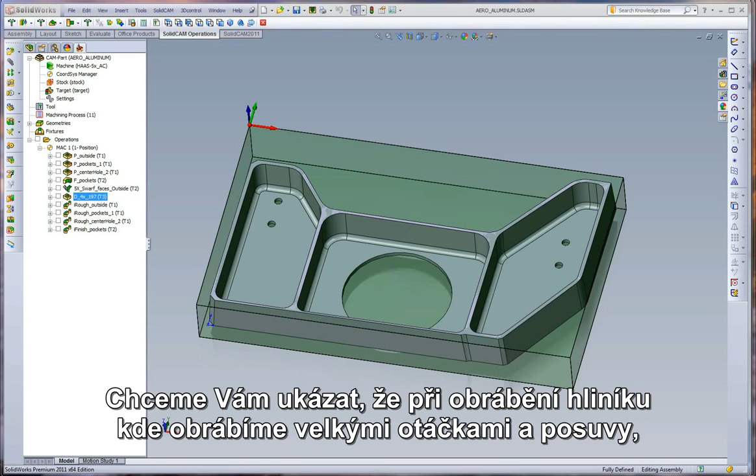Hi, today we're going to compare standard machining to iMachining for aluminum. We want to show that even with aluminum machining, where we cut at very fast RPMs and feed rates, iMachining is still giving a faster overall cycle time for roughing, rest roughing, and finishing.

So what we have here is an aluminum aerospace part. It is basically a 3-axis part, minus the outside cut which has a 5-axis taper to it.

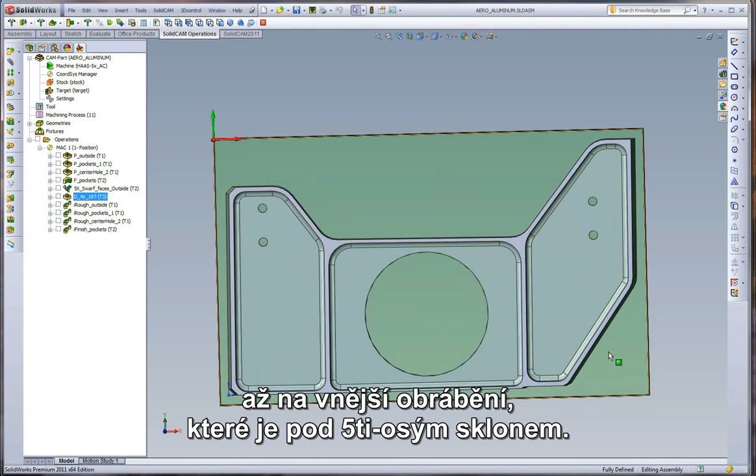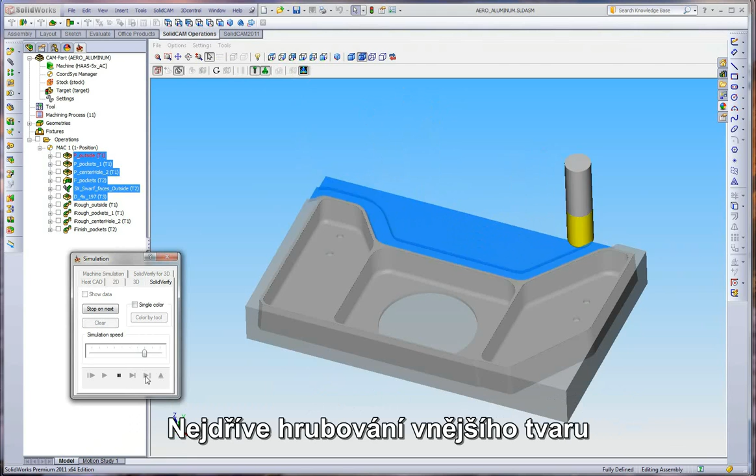We'll run through the simulation first on the standard cuts and take a look at what we're comparing. We'll move to our solid verify. The first thing we do is rough out the outside. We'll take a look at the part as we go through the simulation. So the first cut is roughing the outside shape from the aluminum stock.

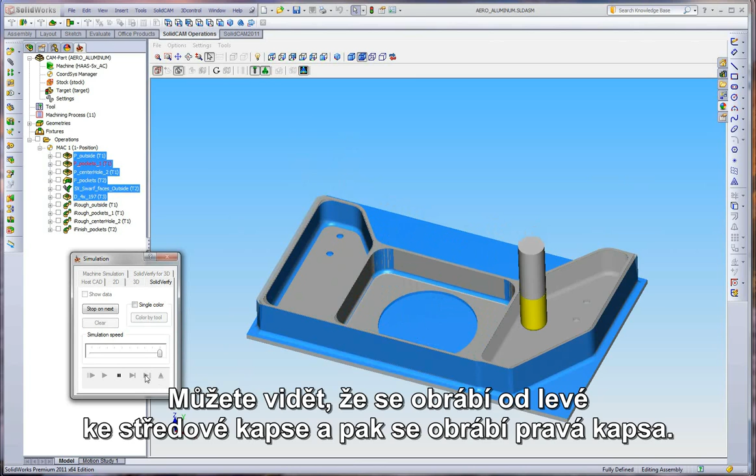After that, we move to the center pockets. You can see going from the left pocket to the middle pocket, and then to the right pocket. After that, we're going to machine the center through hole.

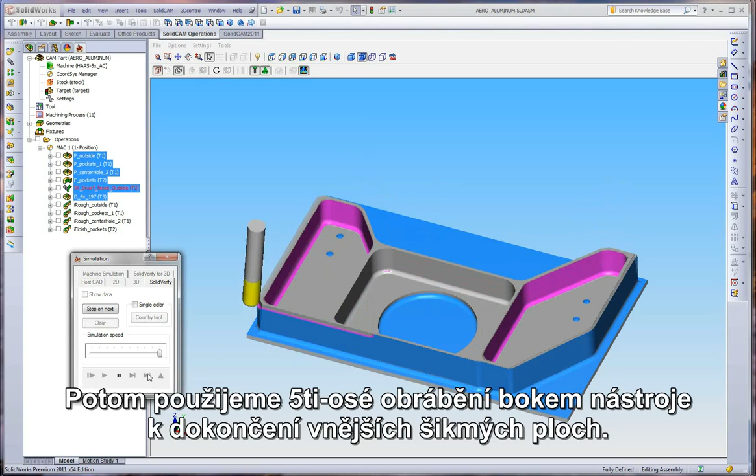After we're done roughing, we're going to use a smaller end mill to finish the walls on the inside pockets. After that, we're going to use a 5-axis swarf cut to finish the outside tapered surfaces, as we see here.

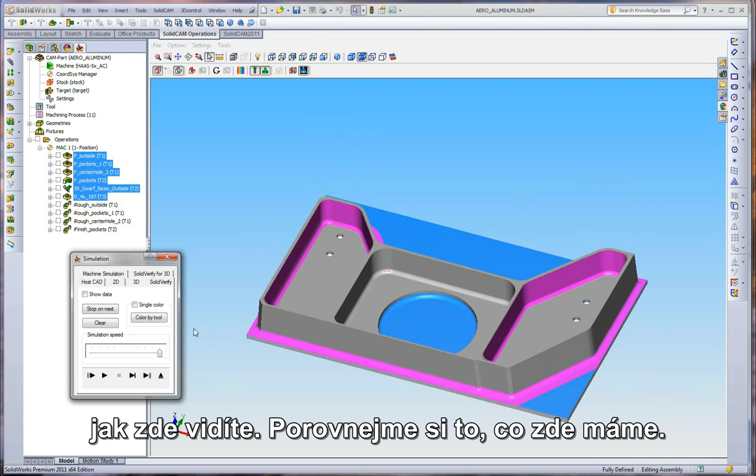And then finally, when this is done, we're just going to have a simple drilling operation to put in these 4, .197 diameter holes, as shown. So now let's go compare what we have.

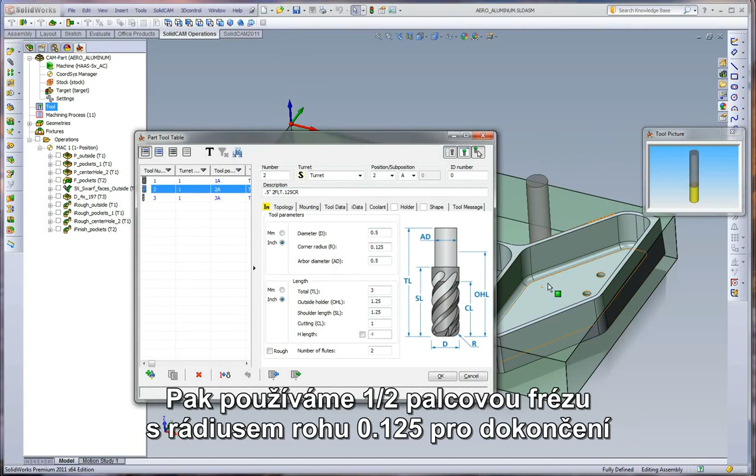What we're using is 3 tools to do this. We're using a 3/4 inch with a .125 corner radius 2-flute carbide end mill, as we can see on my mouse, for the bulk roughing. We're then using a 1/2 inch with a .125 corner radius to finish the outside and the inside. And finally, we're just using a .197 drill to finish the 4 holes.

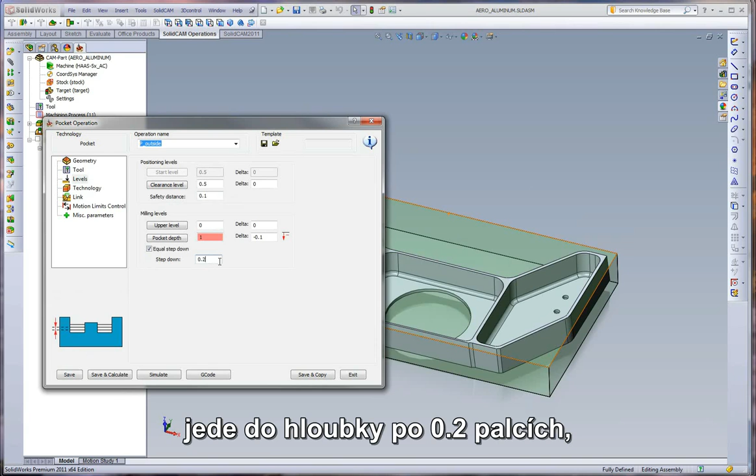Now let's compare what we're doing with standard pocketing. The first operation, we're doing a 200 thousandths depth of cut. Our feed rate for this is 8,000 RPM at 100 inches a minute.

If we go to our second cut for the center pockets, using the same tool, same feed and speed, 8,000 RPM, 100 inches a minute, and we're doing the same 200 thousandths. In this operation, we're also finishing the floor with the ball mill, so we have a 15 thousandths floor offset, and we are finishing with the same tool.

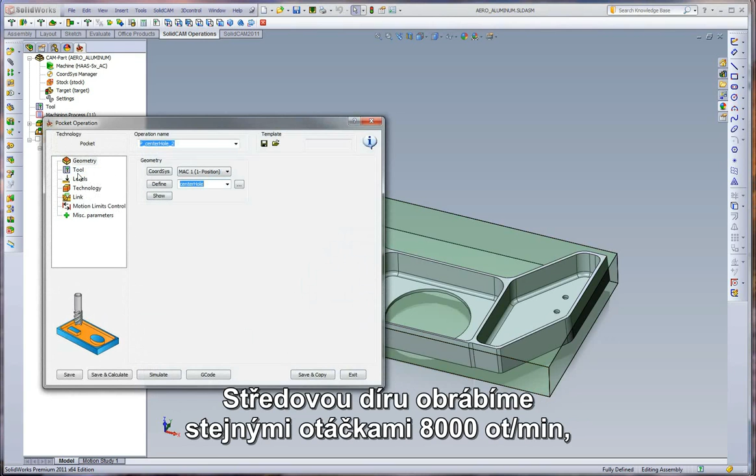For the center hole, we are doing the same 8,000 RPM. The only difference here is we're also finishing the wall. When we are finishing the inside pockets, we're switching to the 1/2 inch end mill, still sticking with the same 8,000 RPMs and 100 inches a minute.

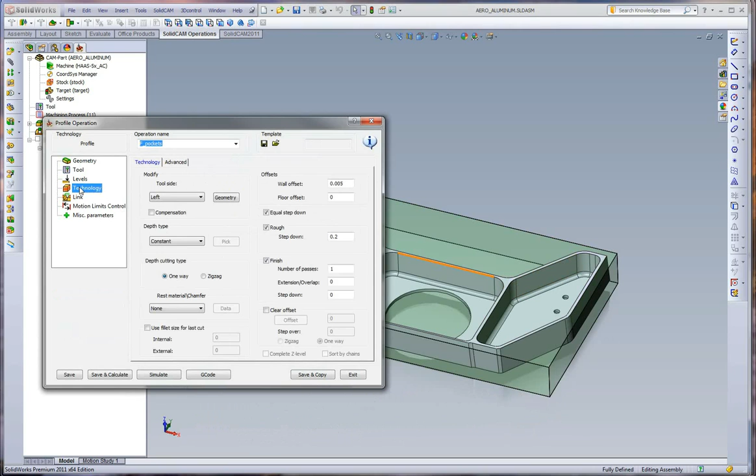When we go to our technology, we're doing a 200 thousandths step down still. However, we are doing a rough and a finish at the same time. Because of the excess material left over in all the corners, we can't just go right to finish size. We have to take a rough cut, which is 5 thousandths away, and then a finish pass, which is to size. If we go to the solid verify and take a look at this, it'll be quite clear what's happening.

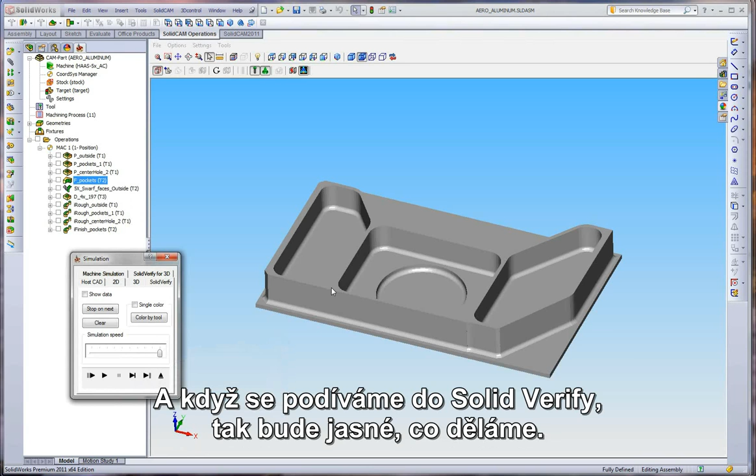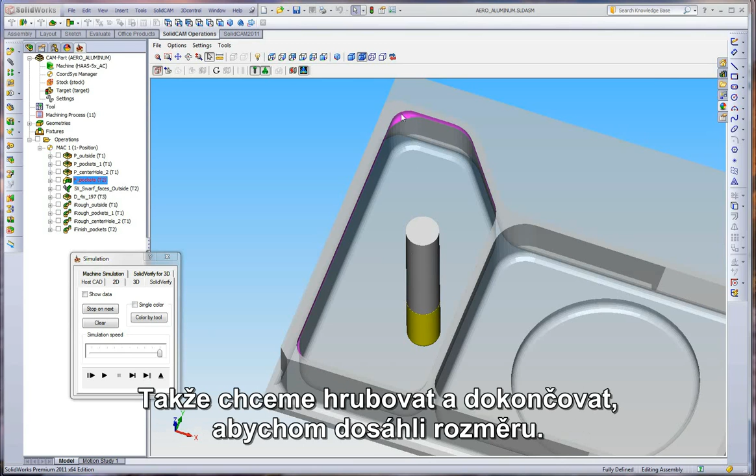So as we zoom into this one pocket here, and single step through, just one level, we can see that in some of the corners we have excess material from the larger tool. On the straight walls, we only have our 5 thousandths wall offset that we define. But because of that, we want to do a rough and finish to bring that wall into size.

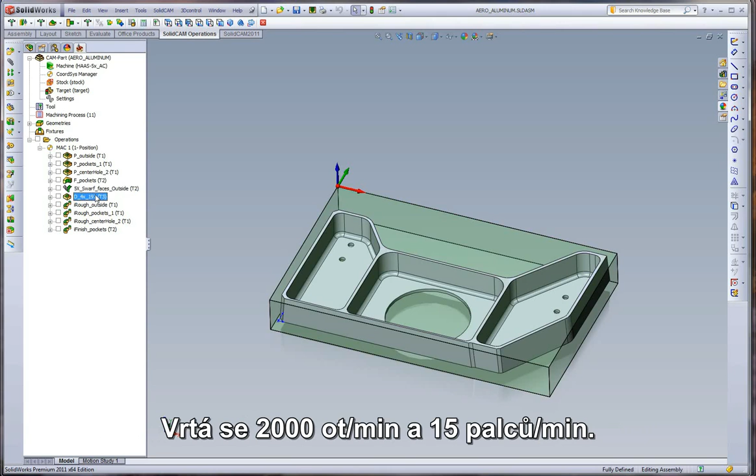The 5-axis swarf cut is doing the same thing as the pocketing: a 200 thousandths step down, 8,000 RPMs, 100 inches a minute. And the drilling is working at, I believe, 2,000 RPMs and 15 inches a minute with a straight peck.

Now, what we want to compare is what's the difference between iMachining and standard pocketing. So if we look at the standard pocketing toolpath, we can see we have multiple step downs, the 200 thousandths, and our step over. We see many repositions to continue with climb cutting.

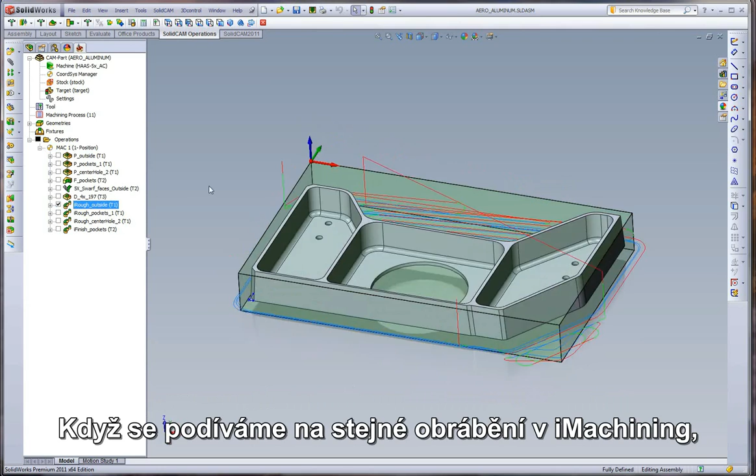If we look at that same cut with iMachining, what we see is no retracts. In iMachining, we're also going full depth of cut. We are doing a smaller step over because we're going deeper. However, the tool is staying engaged longer.

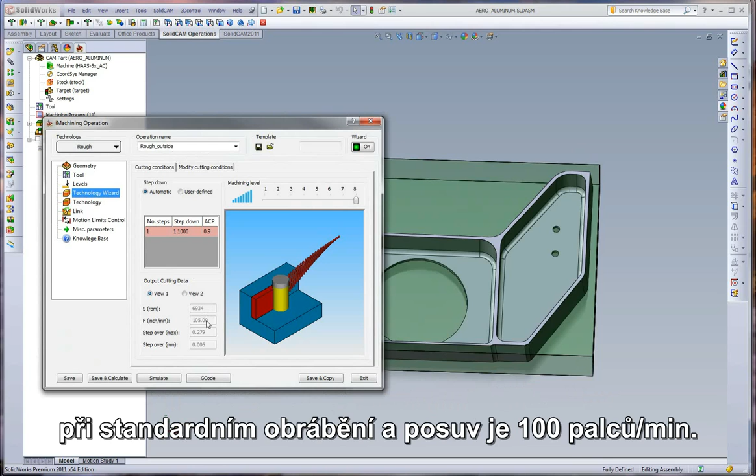If we go and look at the feed rates that we're running here, we're running a little less than 7,000 RPM, so a little bit less than the standard pocketing, and we're running 100 inches a minute. Those are the values generated from the wizard.

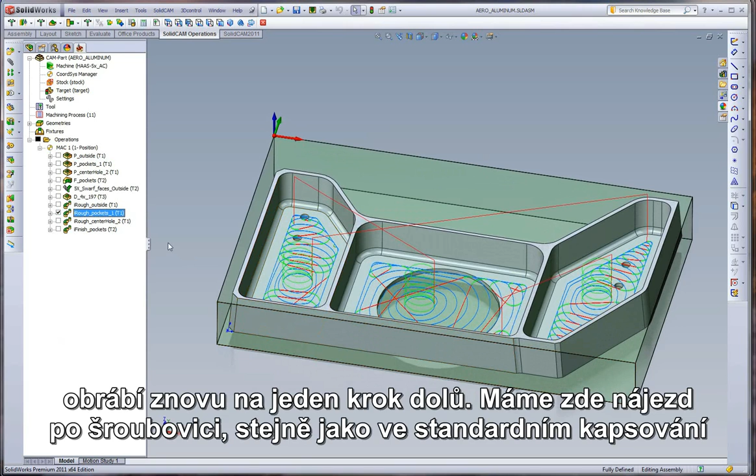If we look at the inside pockets, you can see we have our standard offset style strategy, once again doing multiple step downs. If we go to the iMachining strategy, we're doing a singular step down once again. We have our helical entry, just like the standard pocketing, both using the same helical angle, 5-degree entry ramping. The difference here is, as we see with iMachining, one step down, very few repositionings. We're running the same feed rate again as the roughing, less than 7,000 RPMs and roughly 100 inches a minute.

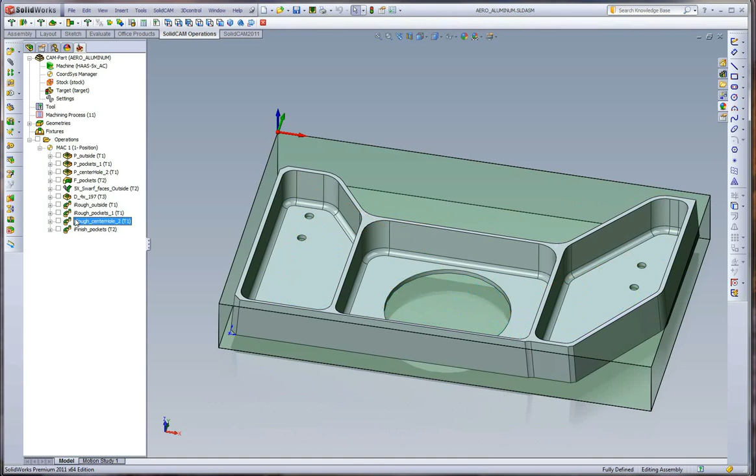If we look at the roughing in the center hole, it's basically the same as the previous operations. Now the finishing, this is where things get a little interesting.

If we look at the profiling operation, we have double passes around the entire part to try and achieve our rough and finish.

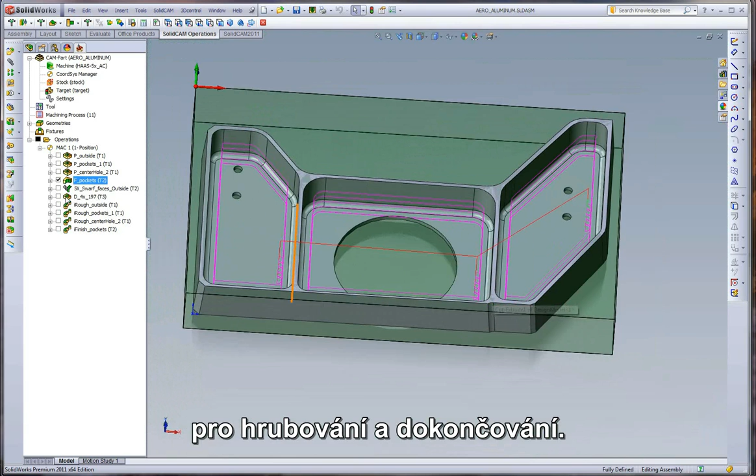When we look at iMachining and iFinish, we do something very special here. What we do is analyze the entire geometry and look at where the leftover material is.

As we see here, we have our parent operation, which was the rough pockets. It knows the previous tool, wall offset, and fillet radius, and what we do is analyze where there's excess material.

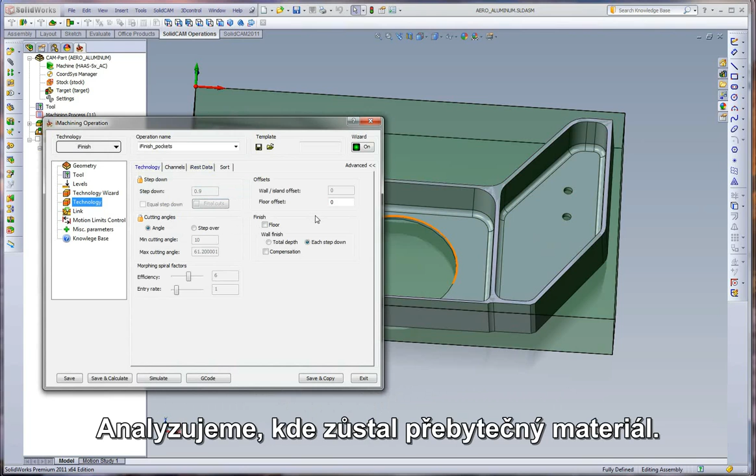What we're trying to achieve is a final finish pass around the entire contour that is just removing the wall offset. So if we were to go and look at this toolpath...

What we're going to see is any of the corners that would have had the toolpath being over-engaged, we are now finishing those areas first with a roughing toolpath.

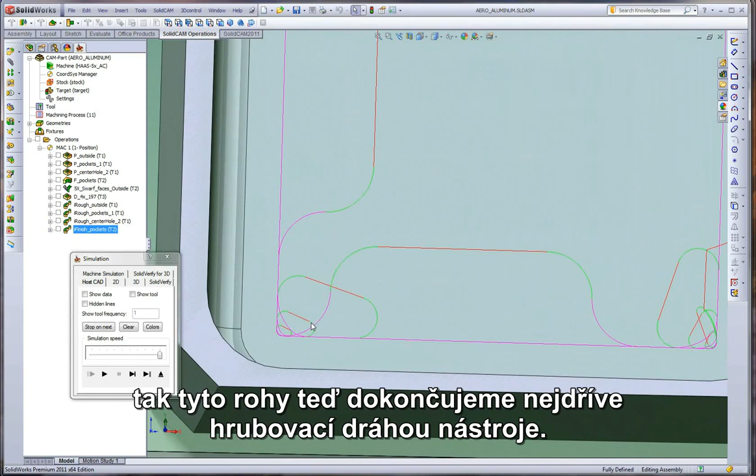So we see the corner here, the corner here. As we look at the large corners, where the tool would still be able to take the wall offset in one final pass, there's no toolpath.

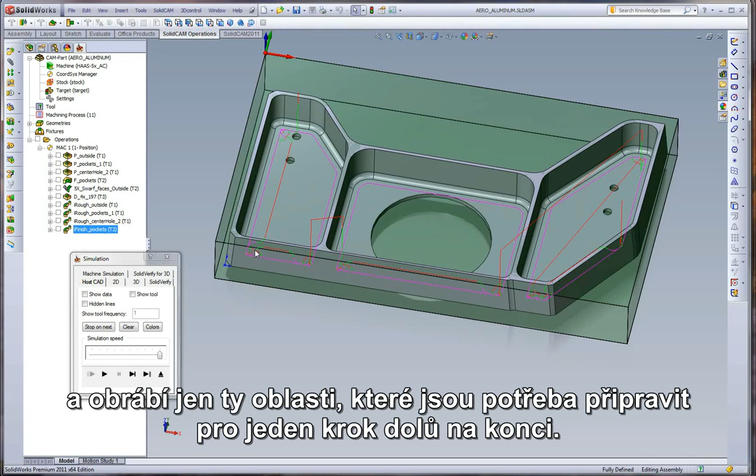So the difference here is iMachining is able to intelligently analyze the contour, machine just the areas it needs to first, to prepare for one single step down at the end.

This is very unique to iMachining. No other software has this.

This allows us to take one final pass at full depth of cut because we know we're getting full stability with the end mill, and that the tool is not going to get over-engaged in any of the corners, because iMachining took care of it.

We can go take a look at the simulation and see what's the difference between iMachining and the standard pocketing.

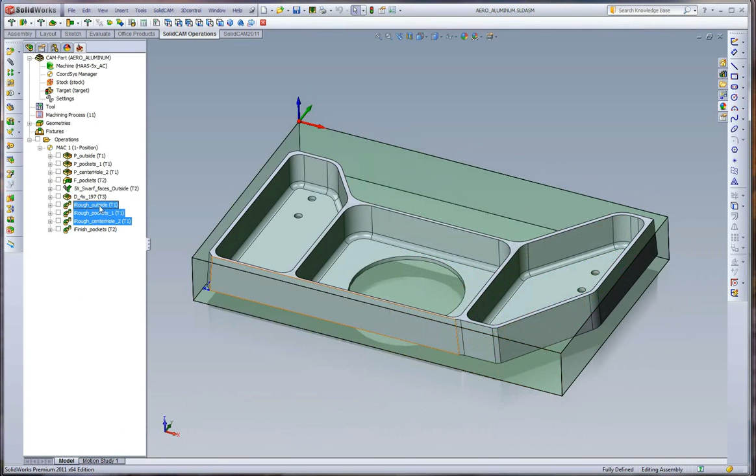We'll reorder these operations so we don't have to simulate them. Go to our solid verify. Once again, let's look at our part while the simulation is going.

So with iMachining, you can see it progressively shave the stock away from the outside. As we see it do the center pockets, we see it helical enter, and then we see it clear away the material at full depth of cut.

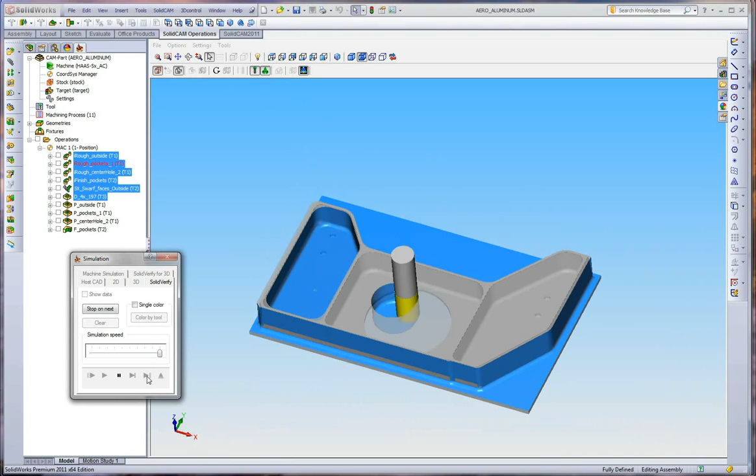Working from the left pocket to the center pocket, and then finally to the right pocket, progressively shaving away the material the entire time.

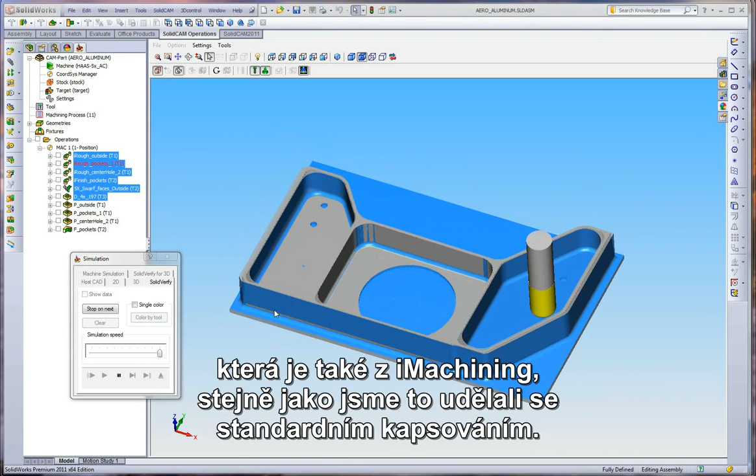We still have the finishing pass that we're using with iMachining, same as we did with the standard pocketing. After the three main pockets are roughed, we're then going to switch over and do the center hole.

Let's slow up and watch the iFinish toolpath work with the smaller half-inch tool. What we're going to see is it clears out the corners and gives one final preparation pass.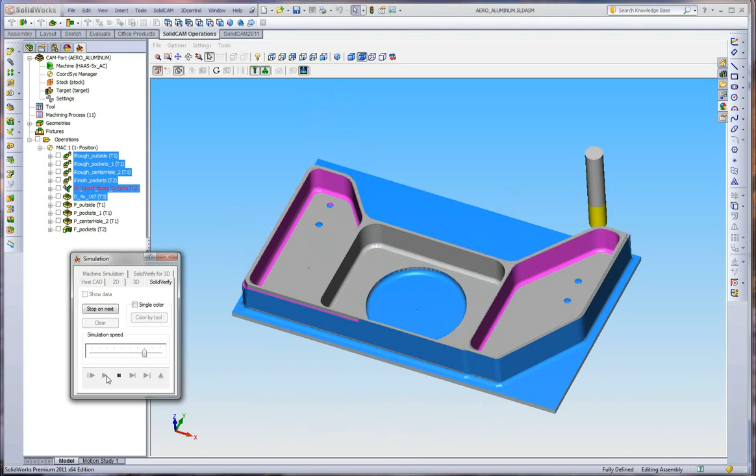And as we had with the standard, we're still using a 5-axis swarf cut to finish the outside.

Now for the nuts and bolts of what time savings we get. We have prepared a simple Excel document to explain the difference.

So we have our four cuts: roughing the OD, the pockets, the center hole, and the finish pockets. And then we also have our 5-axis swarf cut and our drilling.

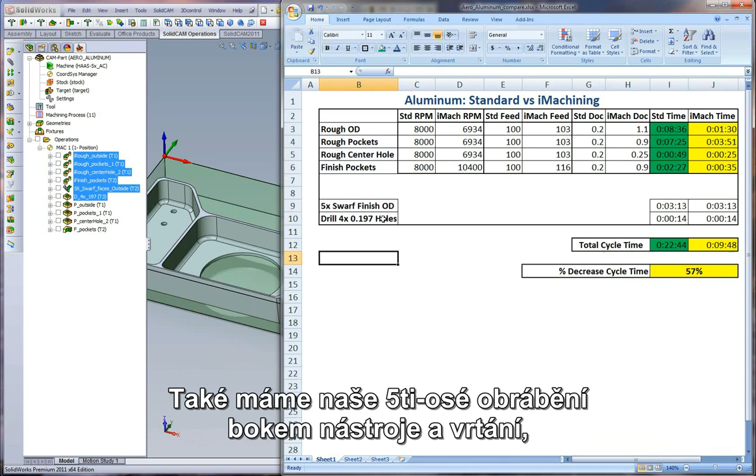We're using the same strategies for both, so we have the same times listed, and we're now talking about RPMs and feed rates. What we have listed is our standard RPM and iMachining RPM.

Same with feed rate, depth of cut, and cycle time. As we can see, in standard we're actually using a little bit more RPM for the larger tool than what we're using in iMachining. On the finishing, we're using a little bit more RPM.

When we look at the feed rates, generally we're looking at almost similar feed rates, 100 inches a minute, a little difference here and there, but generally the same feed rates.

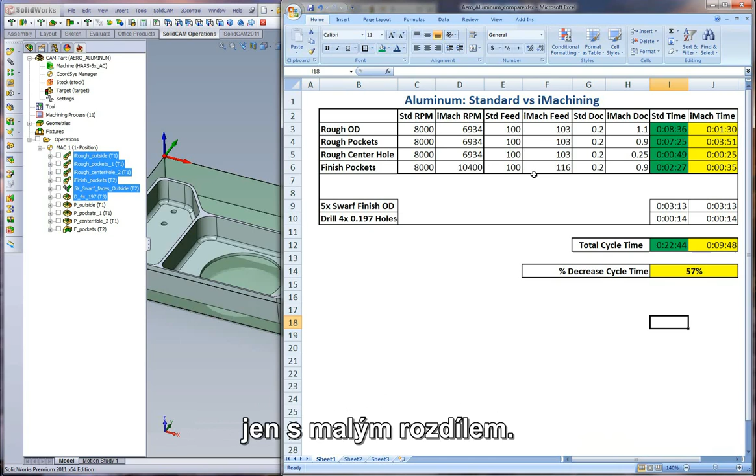The big difference we see here is in our depth of cuts. With the standard pocketing, we're using 200 thou depth cuts for everything. In iMachining, we're going full depth of cut for all of them.

As we see our cycle times here, the roughing from the OD went from 8 minutes to 1 minute 30 seconds. When we did the center pockets, not as much repositioning from the standard pocketing, so it went from 7 minutes to 3.5 minutes, still almost a double increase.

On the roughing in the center hole, 50 seconds down to 25.

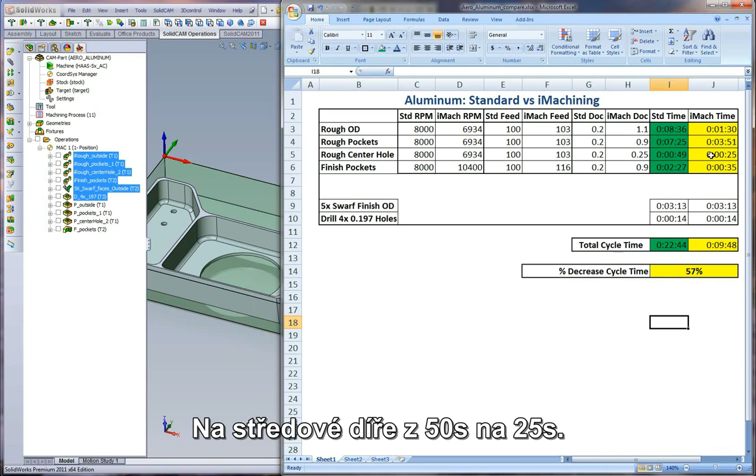A big difference we see here is with finishing, and this is where we think iMachining definitely has a huge advantage over all other toolpaths on the market and all other CAM solutions. With finishing technology built into iMachining, it's not only made for roughing.

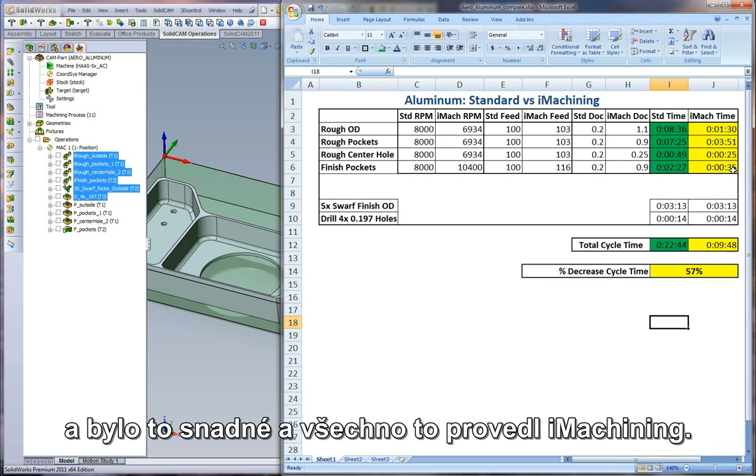Here we see it took a 2 minute 27 second toolpath down to 35 seconds. This was easy, and it was all done by iMachining. It automatically analyzed the contour, found the over-engaged areas, and then took them out first to do one final toolpath at the end.

What this left us with is a 22-minute cycle time for the standard and a 9-minute and roughly 50-second cycle time. This gave us a total decrease in cycle time of almost 60%.

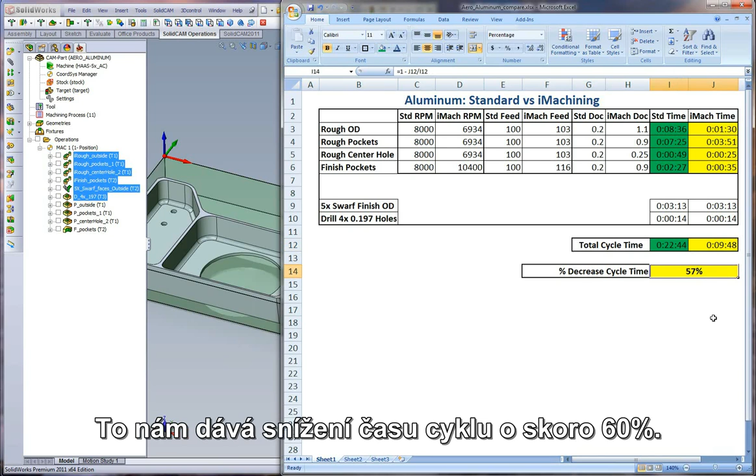For all of us machinists, as we know, at $65 an hour for our machine rate, we're able to get twice as many parts done, even in aluminum, on a standard Haas.

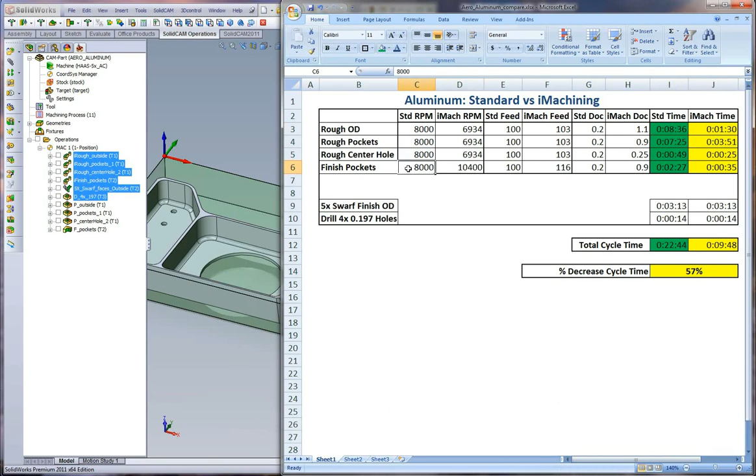None of these RPMs are talking about machining on Makinos or Mikrons or anything. This is just a standard 10,000 RPM Haas VF2 with a 5-axis trunnion. These are the type of savings we can see in aluminum with standard cutting versus iMachining.